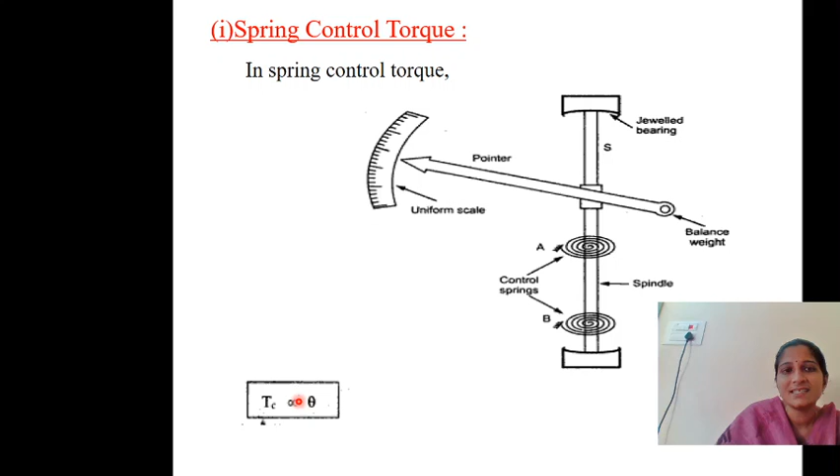At equilibrium, deflecting torque Td is equal to controlling torque. Deflecting torque is directly proportional to the current passing. That is, KI is equal to K theta, so I is proportional to theta. The amount of current flowing in the circuit is directly proportional to the angle made by the pointer, meaning it varies linearly with the deflection of the pointer.

There are different advantages and disadvantages. What are the advantages? The instrument can be placed in any position, horizontal or vertical. That is one advantage. The next advantage is the method does not increase the weight of the instrument, as springs are light. You are using hair springs, which are very thin, so they will not add any weight to the system.

Third, the scale is uniform. Why I am saying this is Tc is proportional to theta, which means I is proportional to theta, so the current will be varying linearly.

So as it is linearly varying, the graph will be a straight line, that means the scale will be a uniform scale, that means the points will be of equal distance. 1 ampere will be at equal distance to 2, and it is equal distance to 3. That means the scale is uniform.

But there are some disadvantages also. So what are those disadvantages? Temperature variations can affect the length and design of the spring. So it is dependent on the temperature. The springs are dependent on the temperature. If the temperature varies, the readings also might vary. So that is one disadvantage.

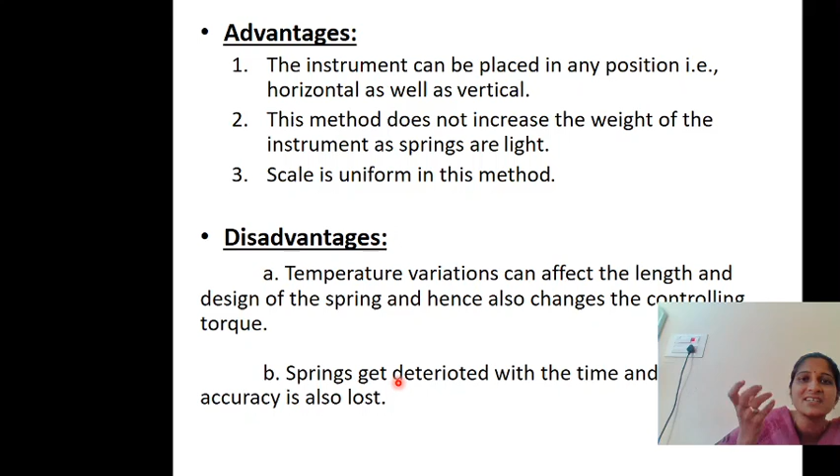And the other disadvantage is that with time the springs will be lost. That means with wear and tear the springs' tightness will be reduced. So that is the second disadvantage. Next, the second one is gravity control torque. We can produce the controlling torque by using two methods. As I told you, first one is spring control and the second one is gravity control.

So whenever there is a deflecting torque in this direction, the pointer will start moving. Whenever this starts moving, the controlling torque attached to the pointer will move in this direction. So these two are attached. If the pointer is in this direction and controlling torque is in this direction, if the pointer moves in this direction, automatically the controlling torque will also move in this direction. So that means as the controlling torque moves, the balancing weight also moves.

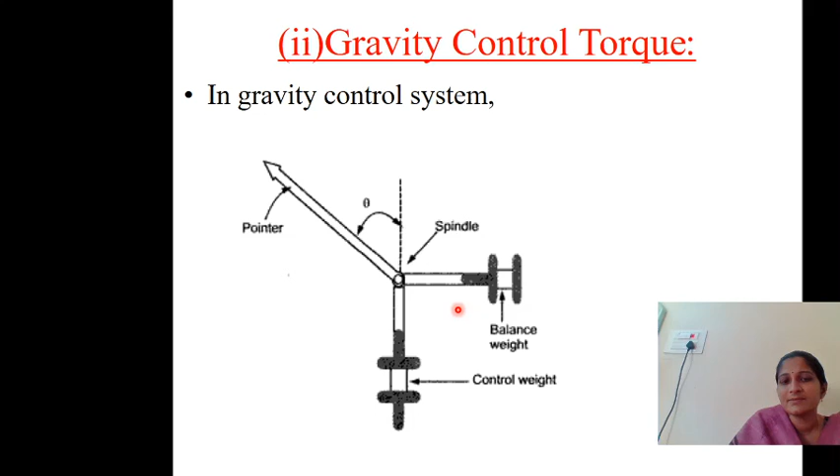So it can be explained by using this diagram. This is the controlling torque. W is the controlling torque weight. Whenever this pointer moves, the controlling torque will also move in this direction. What happens by the gravity? The gravity will always make the weight come to the downward direction. So here this W can be resolved into two components. One is W cos theta and the other one is W sin theta.

So to come back to the initial position, the component in this direction is W sin theta. So W sin theta is the component which is making the control weight come back to its initial position. So that's what we have written here. When deflected by an angle theta, the weight exerts a force W sin theta. So now what is the torque? Torque is equal to force into length. Force is W sin theta, and L is the length of the control weight. So torque is equal to WL sin theta.

As you know, deflection torque Td is directly proportional to I. And I told you, very important, at equilibrium the deflection torque is equal to the controlling torque. So Tc is equal to Td, that means WL sin theta is equal to K into I, that means I is equal to some constant into sin theta. So I is directly proportional to sin theta. Whereas in case of spring control, I is directly proportional to theta. But here, in gravity control, I is proportional to sin theta.

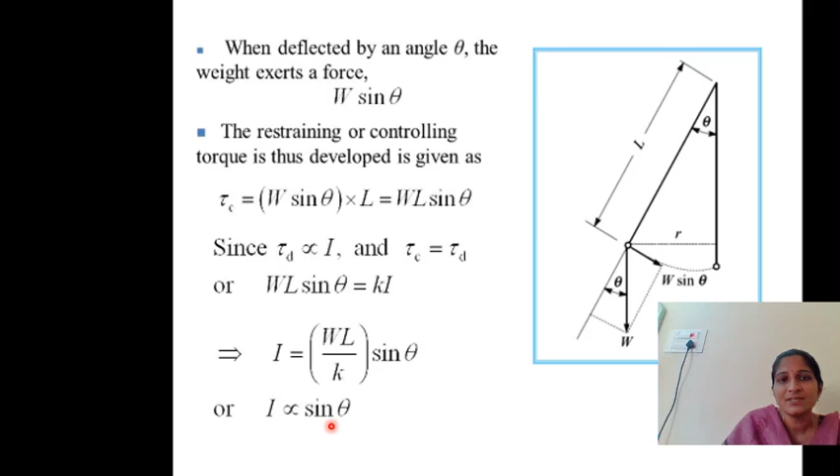In that case, I proportional to theta means the scale is uniform, whereas here I proportional to sin theta means the scale will be non-uniform, and this becomes the equation. Coming to the advantages and disadvantages, it is simple and cheap, and it is not affected by the temperature, whereas the spring control depends on the temperature. The disadvantages are the scale is non-uniform and the system should be used in the vertical position only, so there will be a cause of parallax error. So these are the disadvantages.

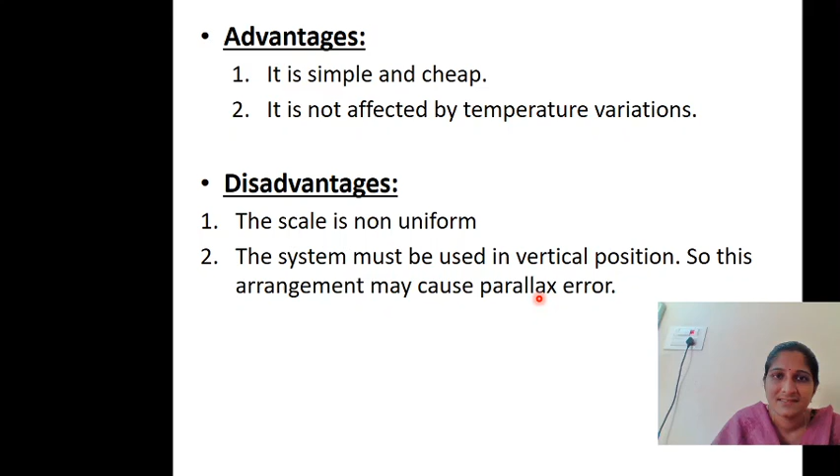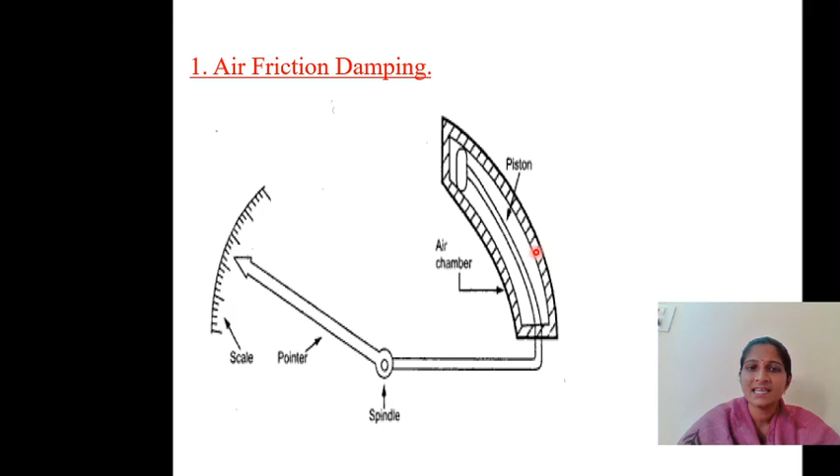So here this is the pointer and this is the spindle. On this spindle there is an air friction chamber. So this is the air friction chamber. In this air friction chamber there is a piston moving in. So in this chamber the piston moves inwards and outwards of this air chamber.

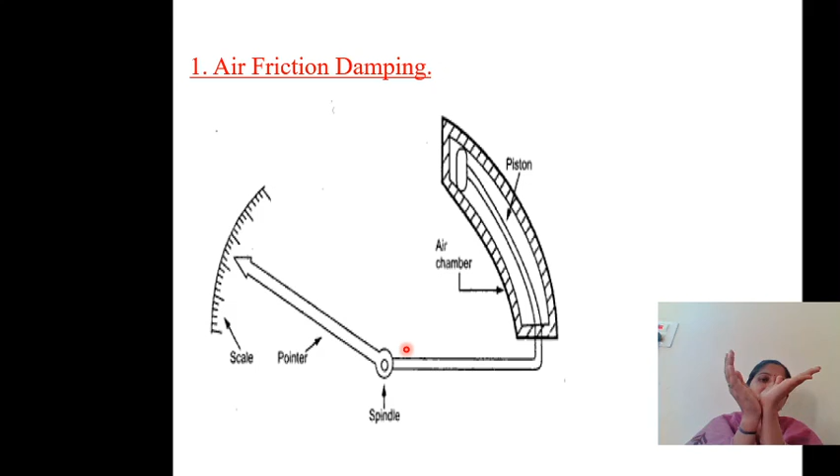Whenever this pointer moves in this direction, the piston will be coming outwards. When the pointer moves downwards, this piston will move upwards. So likewise, here if this moves upwards, this piston moves downwards, and if it moves in this direction, the piston moves inwards. So that means the piston moves inwards and outwards of the air chamber. And so whenever there are oscillations,

here I am discussing about damping torque. Damping means you need to take off the oscillations. So whenever the pointer is moving to and fro, you need to stop that movement and make it in a position. So oscillations you need to stop. For this you are using the air friction damping.

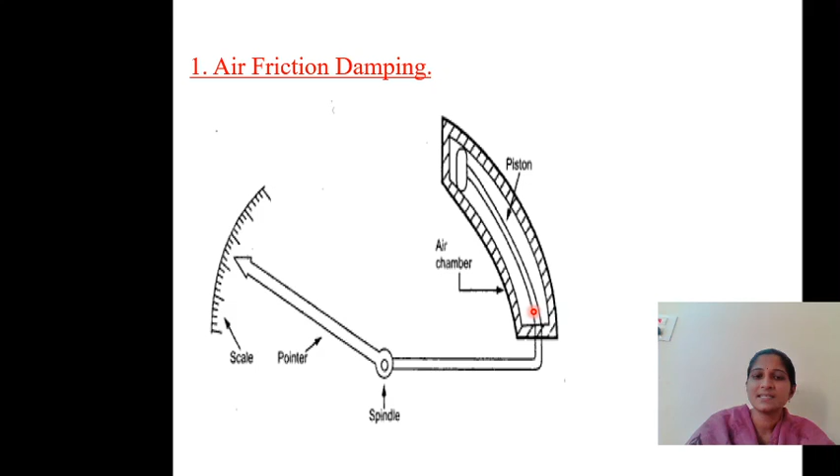So in air friction damping, whenever the pointer is oscillating, this piston will be oscillating in the air chamber, and because of that the pressure will be applied on this piston. Because of that pressure, the oscillations will be damped out.

Next, coming to the second one, fluid friction damping. Previously you have used the air friction damping, where the main component is air. Here instead of air you will be using the fluid. This fluid can be oil or water or some other one, but the main preference is given to viscous liquid. Whatever liquid you use, it should be viscous. Viscous means it will make the spindle not turn easily.

Next one, eddy current damping. In this eddy current damping, two laws we are using. First one is Faraday's law and the second one is Lenz's law. So what is Faraday's law? Faraday's law is nothing but whenever a conductor cuts the magnetic field, an EMF will be induced.

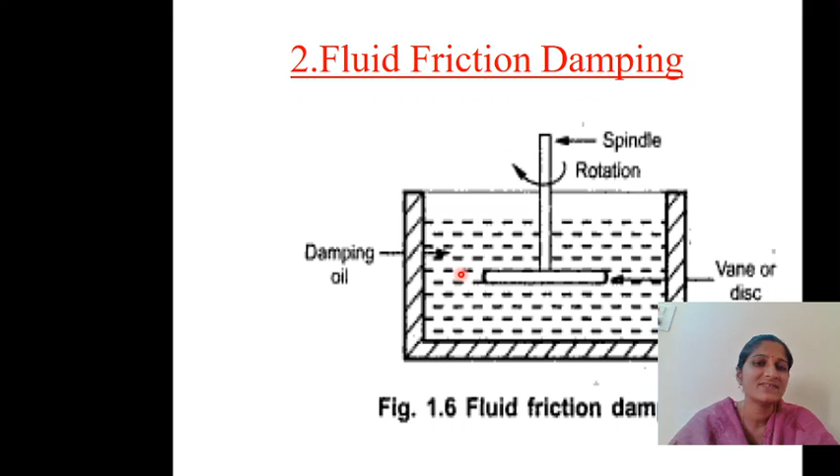So of these three dampings, one is air friction damping, next one is fluid friction damping, and the third one is eddy current damping. Compared to air friction damping, fluid friction damping is the more efficient one. But the disadvantage is leakage of oil. This disadvantage can be overcome by using the eddy current damping. In eddy current damping, there is no oil leakage problem, there is no air friction problem. It requires less space and it is very efficient in damping.

So here there are three torques, as I discussed earlier. One is deflecting torque, second one is controlling torque, and the third one is damping torque. Controlling torque consists of two control methods: gravity control and spring control. And damping torque will be produced by using three methods: air friction damping, fluid friction damping and eddy current damping. So these are different types of torques.